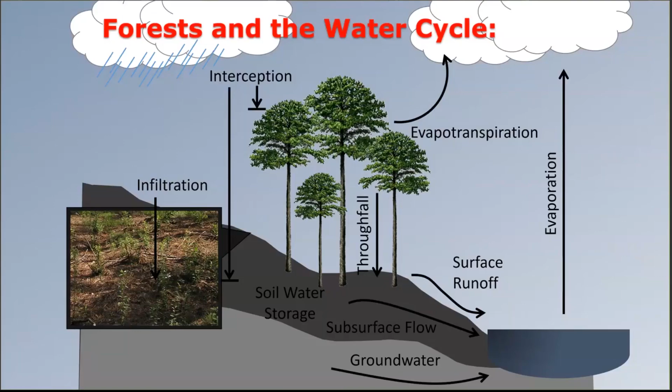Urban environments all have similar general characteristics. As urbanization increases, you see a decrease in tree canopy, vegetative ground cover—these are like your grass layers—and also your permeable topsoil. These are removed for impervious surfaces, things like roofs, asphalt, concrete, severely compacted soil, basically any surface water can't infiltrate into.

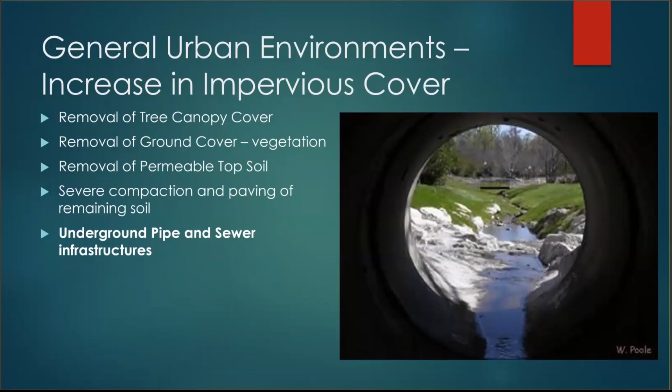As land loses its ability to absorb rainfall, we see a significant increase in surface runoff. It's also important to note that surface water quality will be much lower and flood risk will be much higher in these areas. This is due to the increased impervious surfaces, but also the storm drain infrastructure in residential and urban land uses. Storm drains are pipes that rapidly move stormwater off the streets and roads, unfiltered, into rivers and streams. Impervious surfaces provide runways to increase the speed of runoff, allowing more pollution to be picked up.

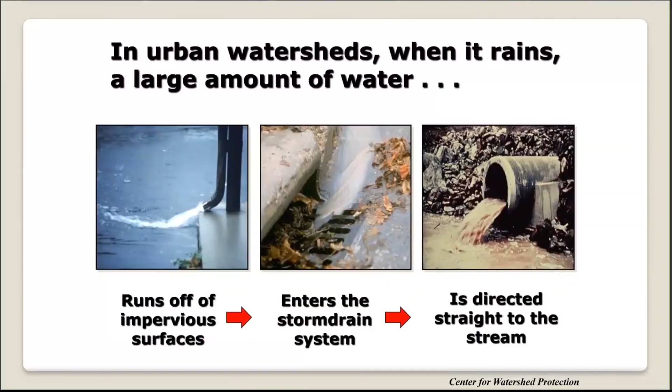So think of how in a large rain event, when water runs unimpeded off your roof, out your gutter, down your driveway, and joins a larger flow of runoff in the streets, it's picking up more and more speed all the while. That runoff is taken rapidly down a storm drain, carrying with it physical debris and other pollution as it enters into the water body much faster than the natural drainage process. These are all the negative impacts of increasing surface runoff.

The official term for the polluted surface runoff we've been talking about is called non-point source pollution. This is when the source of pollution in your water can't be identified because it's coming from runoff over an entire landscape area. The type of non-point source pollution depends on the type of land use. Excess fertilizers and herbicides are common in residential areas, while bacteria, nutrients from pet waste, and faulty septic systems are more common in urban areas.

For increased frequency and severity of flooding, the two key elements to flooding are rainfall intensity and duration. Intensity is the rate of rainfall, and duration is how long that rain lasts. All rivers and streams move water at their natural flow. So in a large rain event, when you get a lot of surface runoff, the speed of that runoff increases as your intensity and duration increase.

The more speed the runoff picks up, the more erosion it can cause and pollution it can carry into the water body. So when the runoff reaches its top speed, it's called a peak flow. Peak flows occur in all rain events, but in a major rain event, the velocity of the peak flow can surpass the natural flow of the stream. As that peak flow enters the stream faster than the natural flow, water levels rise and eventually flooding occurs.

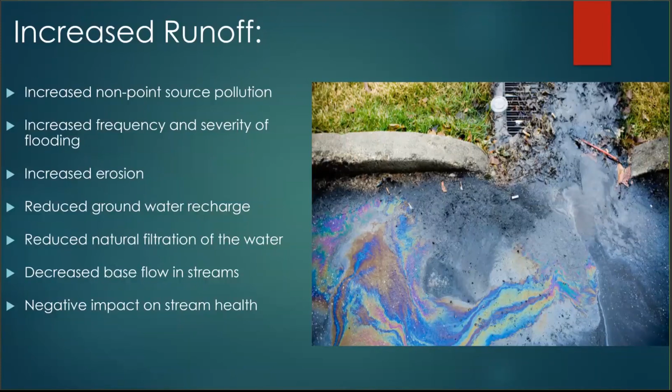Trees help slow down runoff and allow for more infiltration, decreasing frequency and severity of flooding, while also facilitating groundwater recharge, increasing base flow, which increases the natural filtration of the water. Trees also have a really cool phenomenon in rain events that help slow down stormwater. This is called dynamic storage capacity.

The interception we talked about earlier is the water storage after a rain event, also called static storage. This is the water that trees keep and never allow to become part of surface runoff, and it was quantified to about 0.2 millimeters of rain per meter square of a tree's leaf area. Leaf area is the projected area of leaves over a unit of land, but it might be easier to think of a tree's canopy as a container that will capture rainfall up to a depth of 0.2 millimeters.

However, studies have shown that during a rain event, trees actually intercept and store more water than they need. This is called dynamic storage capacity. A study done by Xiao and McPherson quantified the dynamic storage capacity of broadleaf trees to be 0.77 millimeters per meter square of leaf area, and coniferous trees to be 1.25 millimeters. Trees will hold on to this excess rainfall for anywhere up to 3 hours and slowly drip it out, slowing down the speed of your runoff and allowing more time for biological processes to take place.

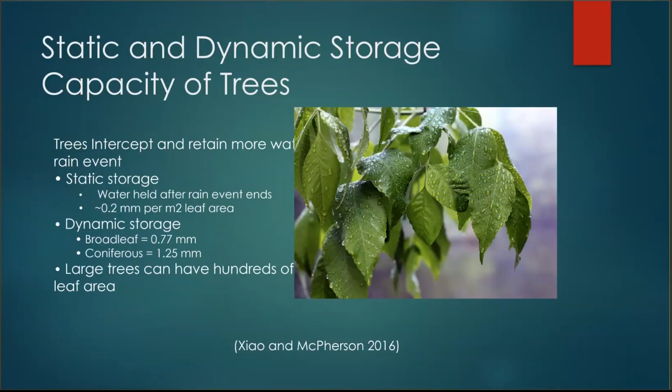So this would be an example of a common hackberry, which is a good riparian species tree. In this example, the tree is 50 feet tall with a 14-inch diameter trunk at breast height and has a 35-foot crown spread.

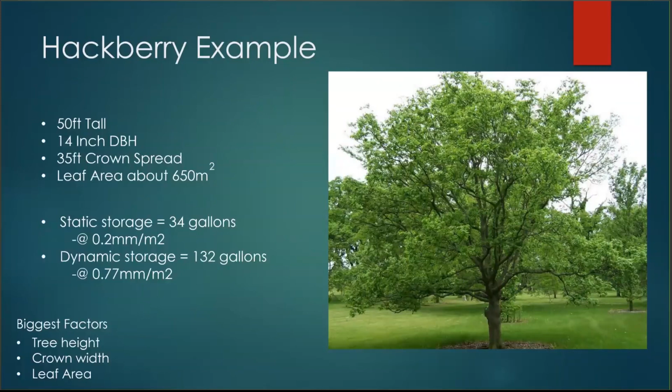Using an online tool called iTree Eco, I calculated the leaf area to be about 650 meters squared. Taking that number into the USGS rainfall calculator, we find the static storage to be 34 gallons and the dynamic storage to be 132 gallons of water. So in a rain event, this one hackberry tree delays almost 100 gallons of stormwater runoff for up to 3 hours and prevents 34 gallons of water from ever becoming runoff.

This is a side-by-side case study done in the North Carolina Piedmont. On the left is a 3 square kilometer forested and open space watershed, and on the right is a growing urban watershed less than 1 square kilometer in size. The forest is 1% impervious and the urban area is 44%. These areas are less than 30 miles apart, just north of Raleigh, North Carolina.

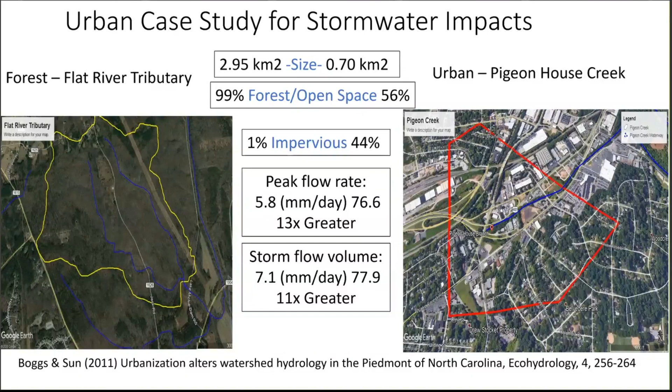In the urban watershed, the peak flow rate was 13 times higher and the storm flow volume was 11 times greater, meaning stormwater runoff for the same storm moved 11 times as much water by volume and 13 times faster than in a forested watershed. And this study was only at 44% impervious. Generally, urban landscapes in bigger metro areas have impervious surfaces much higher than that.

When we examine the Dallas-Fort Worth area specifically, it was the fastest growing metro area in the last decade, adding more than 1 million citizens in the last 8 years. It's expected to be one of the fastest growing in the next decade too, which is a good thing, right? Growing population implies opportunity, which implies fundamental desirability. People perceive the Dallas-Fort Worth, North Texas metro area as a great place to live and where they can succeed.

Adding people means an expanded workforce. New residents mean new customers for local businesses, which increases tax revenues that cities can put into roads, schools, and parks. We understand this, and one of the big points we're trying to impart is that we're not against population growth and urban expansion. But all this growth is possible while maintaining sustainable watershed health, and for that to be true, careful planning is critical.

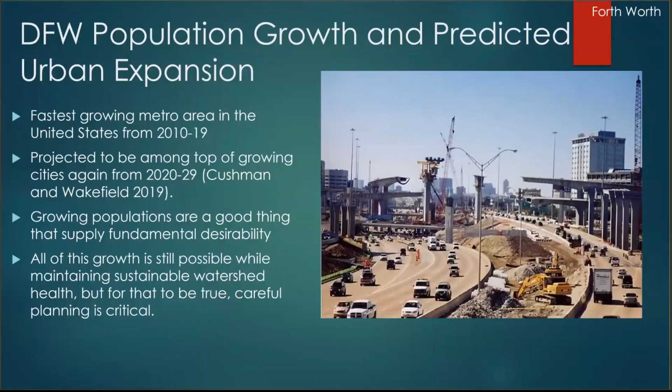Unplanned rapid urbanization is one of the biggest threats to watershed health. A study by the Committee on Environment and Public Works in the United States Senate found that an 8% increase in population could correlate to a 41% increase in impervious surfaces. We talked about how impervious surfaces increase flood impacts and non-point source pollution, but they also put serious strains on the streams themselves.

These are pictures of a stream in the W.G. Jones State Forest in Conroe, Texas. The area saw a lot of development in the last half century, particularly around the Jones State Forest, and in turn this stream has had to take on increased stormwater runoff and higher peak flows than it was naturally carved to handle over hundreds of years.

As you can see, the stream bank is eroding, bringing unwanted sediment into the stream, which over time will affect stream flow and degrade water quality for aquatic life. It can even get so bad that it negatively impacts human health. The EPA maintains a list of impaired water bodies in the United States called the 303(d) list. Several bayous in the Houston area are so impaired that they have non-contact restrictions, meaning if someone were to swim or eat fish from one of those bayous, they could get seriously ill.

Overloading our streams and increasing the severity of flooding has serious financial impacts, specifically in urban areas, because they have to rebuild cities, businesses, and infrastructure after a flood. I'm going to keep picking on Houston here because it's where I work, and it really is one of the best examples of the negative effects of rapid unplanned urbanization.

Houston has no zoning laws. People are able to build pretty much anywhere, including right on the creeks and bayous. Houston is an area that, due to its geographic location and soil hydrology, was seriously impacted by flooding even before paved roads and impervious surfaces became as fundamental as they are today. Of the 10 most costly hurricanes in U.S. history, Houston has 3 of them, and they all occurred in the last 15 years. Hurricanes Harvey, Ike, and Rita caused an estimated $174 billion in damages combined.

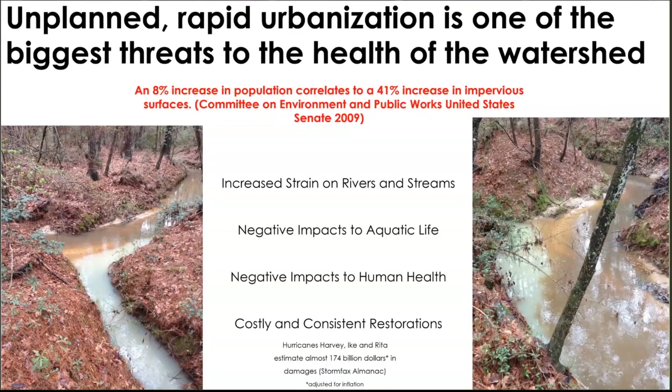So how do we avoid rapid unplanned urbanization? The simple answer is planning. When planning new development projects, it's important to understand how all phases of development will impact stormwater runoff. There are several things to consider to positively impact the watershed through the design, construction, and post-construction phases.

For the design phase, consider LID, or low impact development, which is the idea of designing properties to manage stormwater runoff as part of green infrastructure. LID emphasizes conservation and the use of on-site natural features to protect your water quality.

This permits water to be treated where it falls, allowing for the natural filtration of the water underground, and limits how much it will need to be treated later at a wastewater treatment plant.

An example of LID is green or vegetated rooftops. This is where you plant vegetation on the sloping roof to help slow down stormwater, and in some cases have irrigation systems that retain the stormwater in a rain barrel or capture system to be recycled for the building's use.

In the construction phase, consider implementing best management practices to protect vegetation and prevent erosion to protect your water quality. Consider minimizing paved surfaces and using alternative materials such as pervious pavement.

This type of pavement allows water to seep into the ground, helping infiltration and also limiting the compaction of soils. They also can save construction companies on installation costs because they don't require underground piping, storm drains, or any kind of sloping and grading, and will have a similar life cycle to that of normal pavement.

To manage for erosion, make a plan and be precise in where you're disturbing soil, and make sure you're mindful of preserving existing vegetation where possible. Think of it like shaving your sideburns - once you remove a tree or disrupt a vegetative root system, you can't just put it back.

And finally, understanding how the new structure and any subsequent parking lot or paved surfaces are affecting runoff. The water will be draining one way - is the speed increased, or does it have a new path? There are several best management practices that can help control stormwater, like retention wetlands, detention ponds, infiltration zones, and bioswales, that are all effective in managing stormwater before and after development.

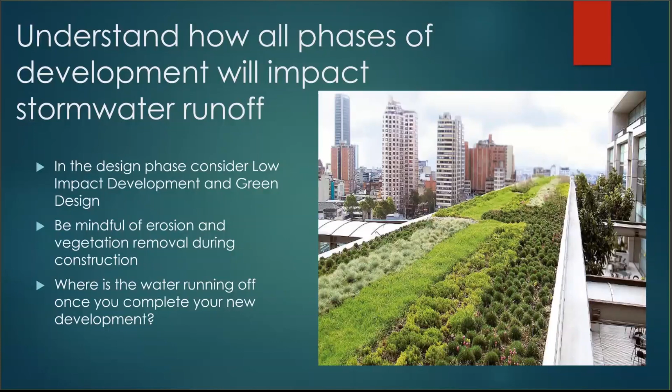So here are some of the current projects that are using trees to help protect our stormwater resources in developing areas. This is a quick overview, but we'll talk about each of these in a bit more detail.

One way is implementing the use of trees in watershed protection plans. Watershed protection plans integrate the viewpoints of all stakeholders in the watershed to help create solutions that benefit the community and the surrounding environment. Watershed stakeholders write a report on what pollutants are impairing the water body and the solutions to restore and protect the watershed in the future.

They then submit that report to the Texas State Soil and Water Conservation Board or the Texas Commission on Environmental Quality, which, if approved, help to fund the solutions for long-term watershed protection.

The Texas Forest and Drinking Water Partnership was established in 2015. This initiative works to increase understanding and communication between the forest and drinking water sectors, and is part of a larger regional collaborative called the Southeastern Partnership for Forest and Water.

The state of Texas is at the forefront of this partnership, working with municipalities, non-government organizations, and private forest landowners to identify and protect forest areas that are critical to surface drinking water resources. And lastly, we talked about implementing BMPs and LID, but just increasing your urban forest canopy as a whole has a myriad of benefits.

So this is the watershed protection plan I'm currently working on in the Cypress Creek watershed. Cypress Creek flows directly into Lake Houston, which is one of the largest sources of Houston's drinking water, so improving water quality is imperative here.

Throughout my job, I regularly use what's called the i-Tree suite of tools. These are tools created by the United States Forest Service, free for download, and they accurately simulate all the benefits of trees. They quantify data into residential energy savings, carbon capture, stormwater reduction, and even water quality.

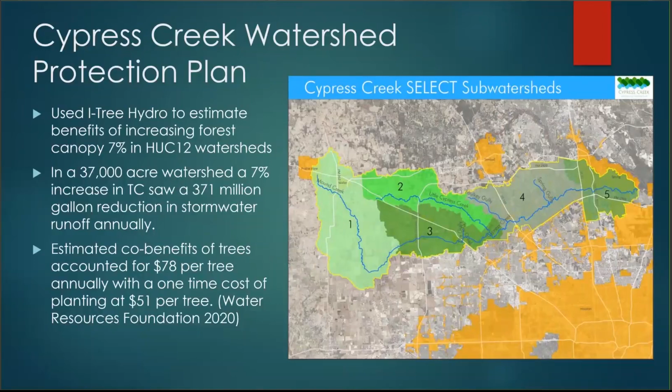The Texas Water Development Board has split Texas into 16 planning regions, generally based on shared watersheds.

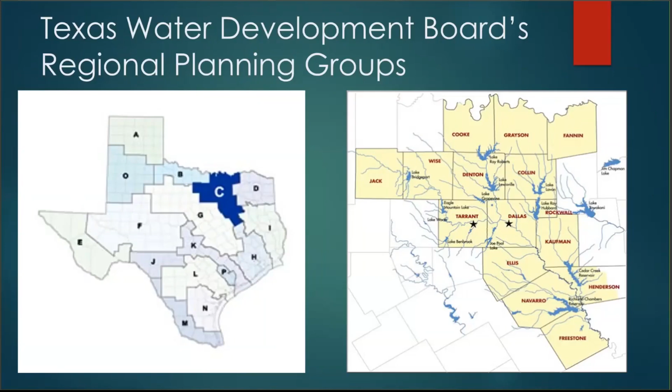The DFW falls into Region C, which includes 16 counties that overlap much of the upper portion of the Trinity River Basin. Region C also includes a smaller part of the Red, Brazos, Sulphur, and Sabine River Basins. Part of the reason these planning groups are split up is to quantify water needs based on land use and population sizes relevant to each area's watershed, measured in acre feet per year—the amount of water needed to fill 1 acre at a depth of 1 foot, equating to about 325,851 gallons. In a 2017 planning report, the Texas Water Development Board estimated Region C's water needs to be over 1.7 million acre feet per year starting in 2020, and 2.3 million acre feet by 2040.

That's where the Texas Forest and Drinking Water Partnership comes in. It follows the narrative that as populations increase, there's an increased need for clean drinking water, but we don't want to keep taking it out of the ground, so we have to limit subsidence. This means increased reliance on surface drinking water resources, and because forests provide the cleanest water of any land use, there's an increased need for forest stewardship.

Currently, all of the city of Dallas's drinking water is surface water, and by having water suppliers invest in forest stewardship to protect their source water, they can save money on treatment costs, energy bills, and filter media. One way municipal water suppliers can invest is by creating funds to acquire forested lands for conservation and protect them from future development. Another is providing incentives to private forest landowners to use best management practices to protect source water upstream.

These are some of the benefits of increasing your urban forest cover. We talked about the benefits trees provide for stormwater reduction and water quality, but they also save residents money on their energy bills. According to our most recent data, there are 33 million trees in the city of Houston, and those trees provided over $53 million in residential energy savings.

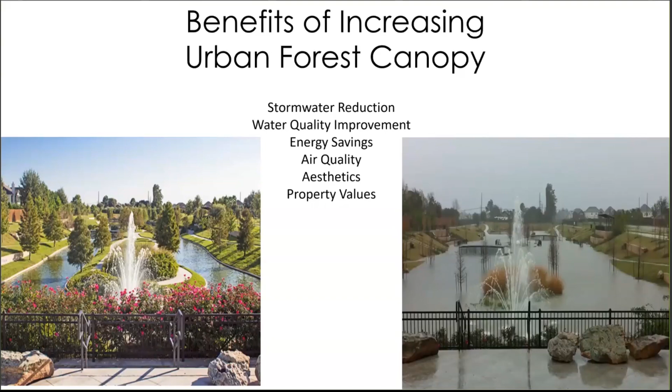The picture on the right is the same park after Hurricane Harvey, where they discovered that because of the added vegetation, the park was actually better suited for flooding protection.

Another interest of increasing your urban tree canopy is human health benefits. Studies have shown that trees provide positive impacts to your physical and mental health. They can help boost immune system defenses and pain tolerance thresholds, and can even save money on healthcare costs.

Texas A&M Forest Service's Urban and Community Forest Program is part of an initiative called Healthy Trees, Healthy Lives. This program aims to impact individual and community lives by ensuring access to community forests and green spaces. Our urban and community foresters foster relationships with local governments and healthcare providers to understand and apply the interrelationship between urban forests and public health.

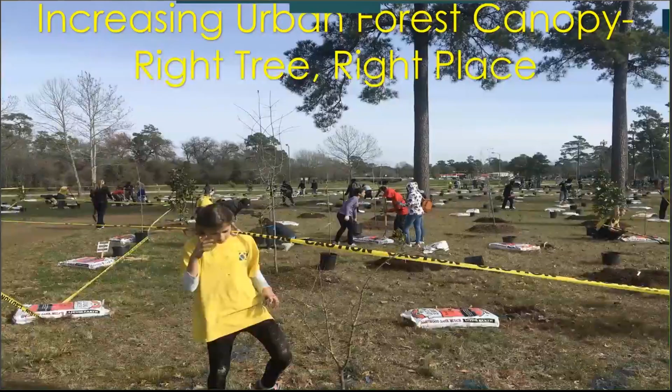So when increasing your urban forest canopy, you don't want to just plant trees for the sake of planting trees. It's about planting the right tree species in the right place with the right amount of growing space to maximize their ecosystem benefits.

So in conclusion, the takeaway should be that trees provide a number of benefits to urban watersheds, including positive impacts to water quality and flood mitigation. Abundant impervious surfaces and storm drain infrastructure increase peak flows of stormwater runoff and rapidly carry non-point source pollution unfiltered into our waterways. Understanding and planning for how stormwater runoff will be impacted by future development is critical to sustaining long-term watershed health while still fostering population growth.

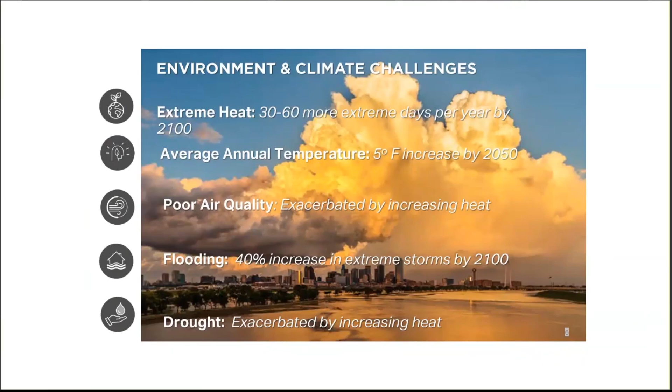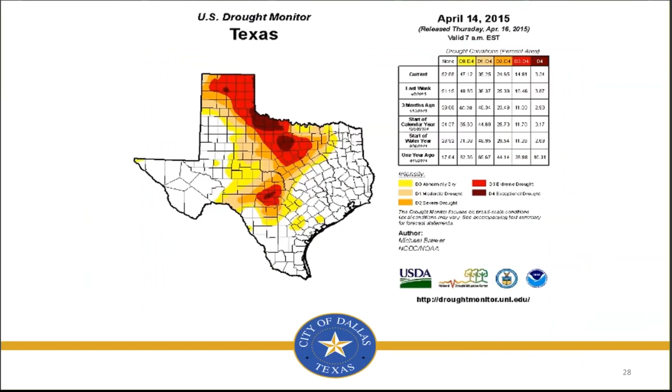This goes back to 2015 when we first started talking about this. This is a map of Texas. We were in level 3 drought, under significant water restrictions. A month later, we had our annual rainfall in about a month, and all 4 of the reservoirs upstream of Dallas were in uncontrolled overflow.

Those of you that know me know that I spent that month down in our emergency operations center. This was a heads up to all of the hydrologists, because this system had never been modeled with all 4 of those reservoirs in uncontrolled overflow. It was considered until that time to be statistically not probable. Statistics don't always tell the whole story, though.

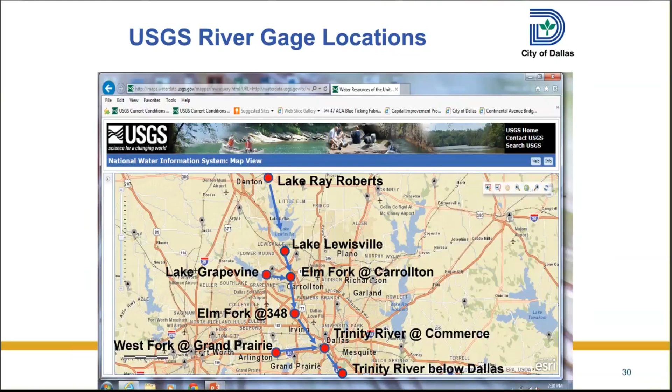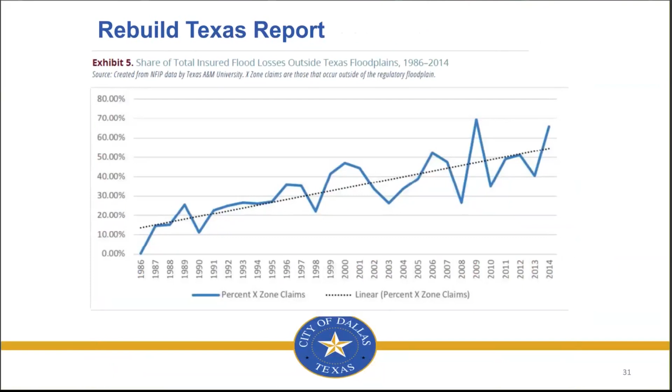So we started looking at that, and we're not the only ones. This is from the state report following Hurricane Harvey, showing the percent of flood losses located outside of the regulated Texas floodplain. You can see a nice increase in that. What is concerning is this is flooding in places that we didn't think it flooded.

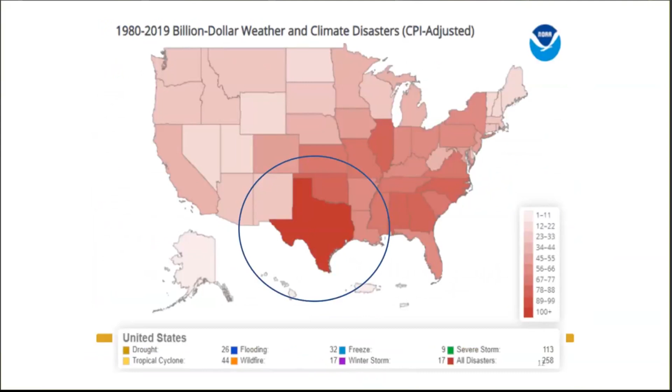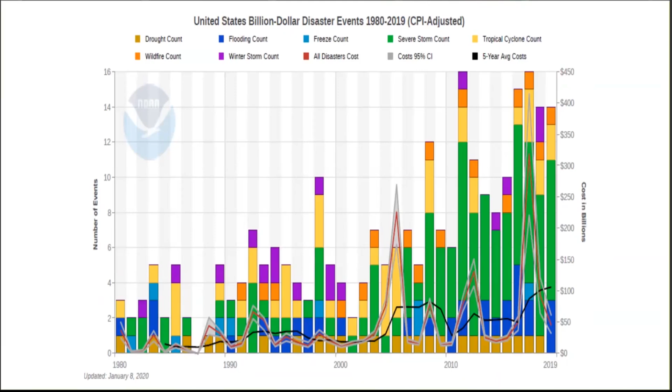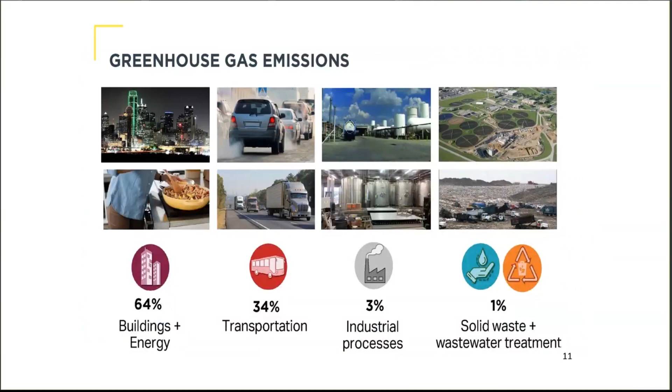So about a little over a year ago, we started working on a comprehensive environmental climate action plan. It was just passed unanimously a couple of weeks ago, May 27th. We looked at a bunch of things, starting, like most cities do, with our greenhouse gas emissions, the majority of which are in 3 different areas: buildings, energy, and transportation. When we started looking at how to fix that, we looked at 3 different primary areas.

We looked at mitigation, which is reducing those emissions. We looked at adaptation, which is how do we manage the risk of climate change, how do we protect our areas from flooding. And then, as we started looking at mitigation and adaptation, we kept coming up with elements that are in a 3rd realm, which is environmental quality.

And what we also found was that trees were involved with all 3 of those major categories of actions. So as we looked at environmental quality, mitigation, and adaptation, we kept coming back to trees.

Overall, our plan has 8 different areas. Don't worry, I'm not going to go through all of them today. I'll do a little bit in our water resources realm, and a lot in our ecosystems realm.

One of the other things we looked at were general primary benefits, but also co-benefits, which are things you get from doing something that you weren't necessarily doing it for. For instance, if we plant trees, we're trying to cool down the air, but we're also affecting the hydrology and the quality of life.

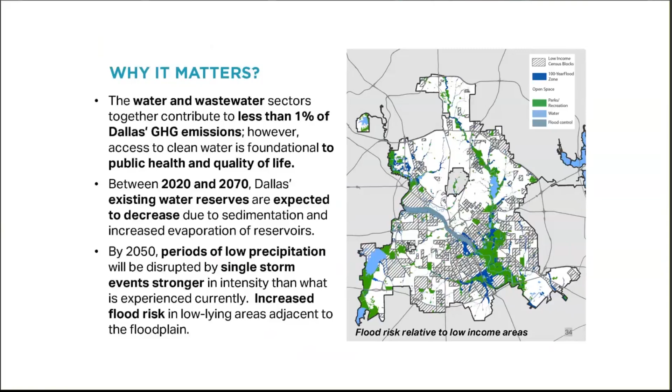One of the first things we did internally was update our trusty drainage manual. The city of Dallas has been one of the founding cities working with COG to develop the integrated stormwater management criteria, which is the local version of low impact design. We originally adopted ISWM on a voluntary basis back in 2009.

What we found, though, is that our engineers really loved this trusty guide from 1993. When we talked with some of our senior drainage engineers, they confessed it was actually 1978's criteria with a new cover. So we recently incorporated ISWM into the standard design process, for both paving and drainage, and updated that guidance.

It's available on our website. The one thing I'll tell you is that it still says low impact design is, I think the word is, encouraged. It was supposed to be required, consistent with CRS requirements, and we'll be working on that change shortly.

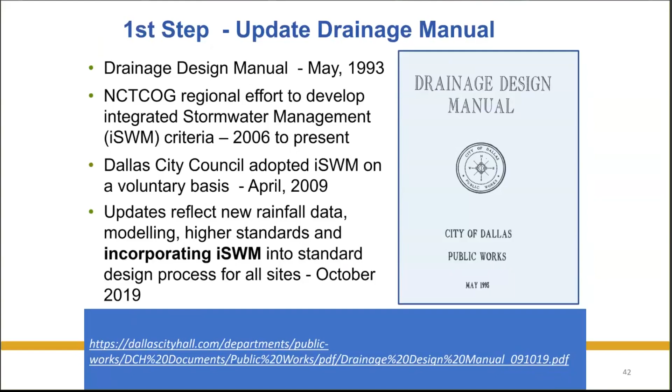One of the other things we've done is the city of Dallas has a higher standard policy where we require additional freeboard over the flood elevations, just to give us a little more room so that fewer of our properties are impacted by flooding. Unfortunately, we go to a maximum of 3 feet above the base flood elevation.

Some of the studies on this nationally show we should probably be looking at 4 or 5 feet. Not sure how we're going to look at that moving forward. However, we also understand that as we look at green infrastructure, that may give us a bit of a factor of safety on some of these other larger events.

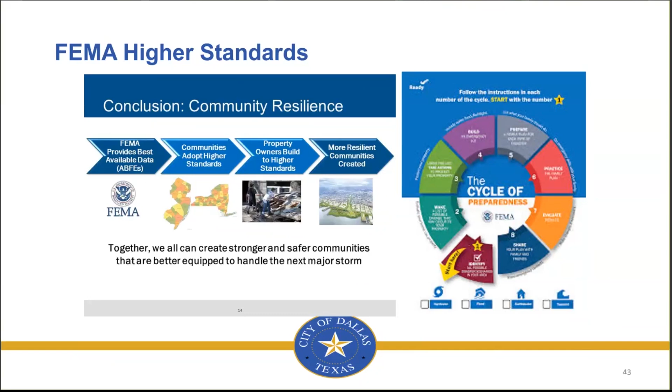This is likely Mac and Matt's most favorite section of our climate plan, and that is to really look at leveraging green space relative to climate adaptation benefits. We're looking to increase the amount of green area, and integrating nature-based solutions on a much greater basis as part of a global public health strategy in Dallas.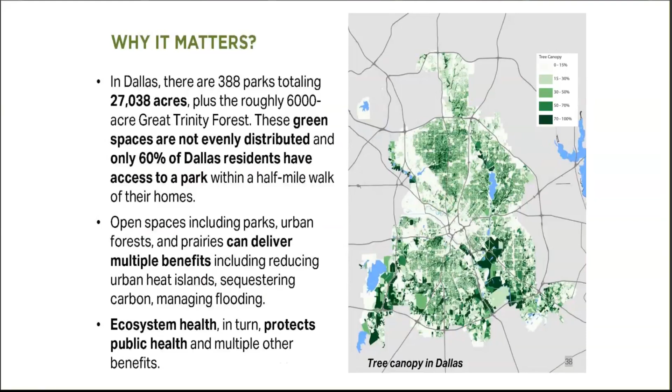It does help with our watershed management. It does help with our urban canopy. And it does help with both our air quality and our heat island impacts that drive some of the other climate-related issues that we anticipate.

I realize this has a lot of font that's really small, and I apologize for that. But the two places that we're already working: one is to increase our tree canopy, working with our friends and partners at the Texas Trees Foundation towards completing an urban forest master plan. We also work with Texas Trees and several other organizations to promote tree planting efforts across Dallas, both on public property and private property.

Each fall we do Branch Out Dallas, which is an effort by the city to give away saplings to property owners that would like to add trees to their property. These are, for the most part, Texas native trees that will do pretty well once they're established.

As I said earlier, all of our goals in our climate plan focus on helping improve our local air quality. Most of the different goals and actions have multiple co-benefits, and as you'll notice, we call them cross-cutting objectives.

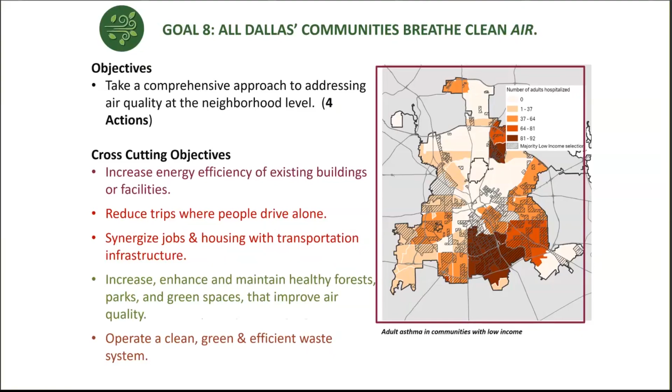So if you want a great summer read, the finished climate plan is at dallasclimateaction.com. We are in the process of developing a stakeholder committee to help advise our Environment and Sustainability Committee on implementation of the plan. I'd say stay posted on that because we don't have that completely figured out yet. It's something we're working on.

And with that, I'm open to questions.

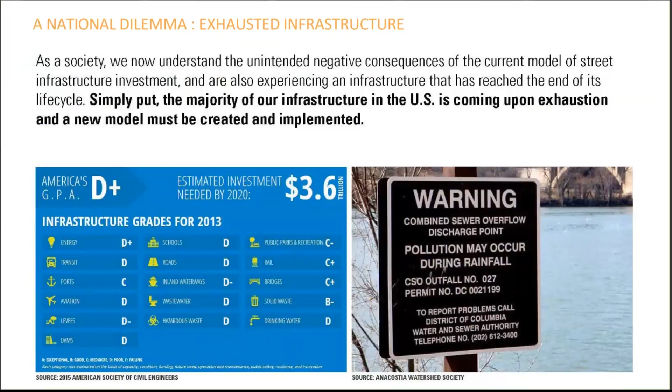It's easy to see that we have an aging infrastructure in this country. The American Society of Civil Engineers ranked infrastructure as a D+, with an investment of nearly $3.6 trillion needed to repair it.

We see infrastructure fail because of heat. We see infrastructure fail because of flooding. We can look at that infrastructure issue as a problem, which it is, but we can also look at it as a potential solution for the issues facing us.

It gives us a chance to redesign our cities. Cities take out billions of dollars in bond elections across the country, and most of it goes to street repair. In most communities, the largest amount of public space is within our public right-of-ways. In Dallas, 38% of all public space is within our right-of-ways.

But yet a lot of our right-of-ways lack sidewalks, they lack adequate areas for public use. They take water and drain it off into sewers and culverts, then move it faster and faster down the system.

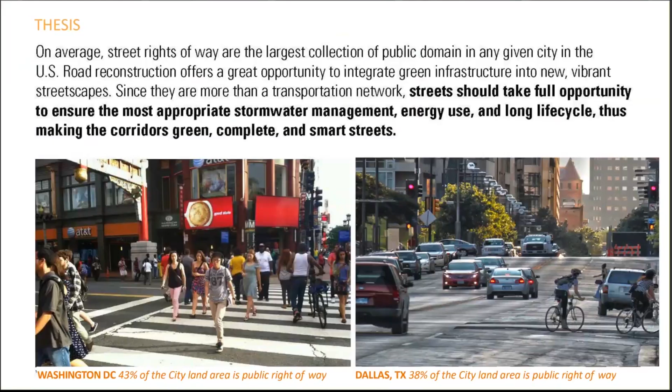So how do we start to rethink our streets, how do we rethink parking lots, how do we rethink how we design our cities as we rebuild them? Not only rebuild what we're doing, but as we continue to grow, design them differently. How do we think of our streets and public spaces as we become more urbanized in a more complete and smart way?

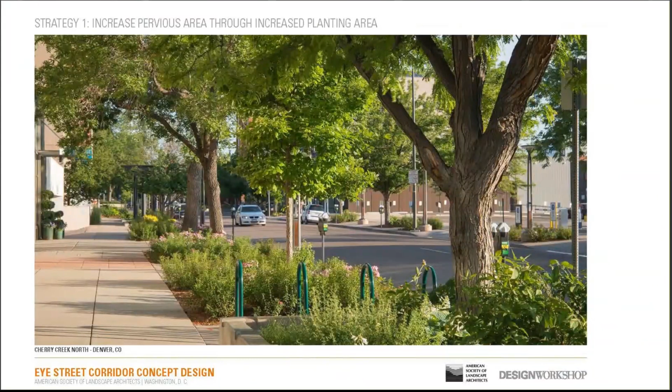We need to do that in a couple of different ways. One is increasing the amount of pervious area that you have. The more impervious surface area you have—and you heard Mac talk about this earlier—it leads to larger amounts of stormwater runoff and increases the urban heat island effect. So how do we increase pervious space to make more room for things like trees and other water mitigation strategies, besides just running it into the nearest storm drain?

But there's an issue—if we have engineers or architects, this is why everybody calls me and says we can't do this, because trees interfere with that. Trees do need certain things to grow. They're living, breathing organisms. They need proper soil volume, water, and nutrients.

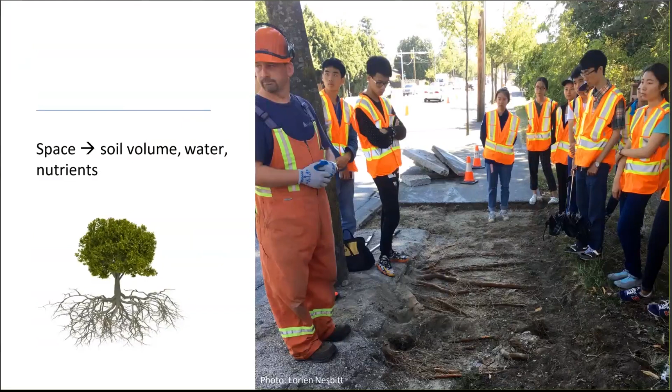Trees need on average about 20 cubic feet of soil volume for every 1 foot of crown diameter. So imagine a 40-foot canopy tree needs roughly 800 cubic feet of soil. That's a lot of room, that's a lot of space, and you have to compete with a lot of other things within that infrastructure.

So how do we start to think outside the box? How do we start to use other types of materials that are on the market now, like structural soils and things like Silva Cells and suspended pavement types of material, where it allows you to not have to compact the soil substrate underneath the sidewalk, street, or parking lot to such a degree that the tree roots won't physically grow, but still be able to get the support that you need for vehicle and traffic.

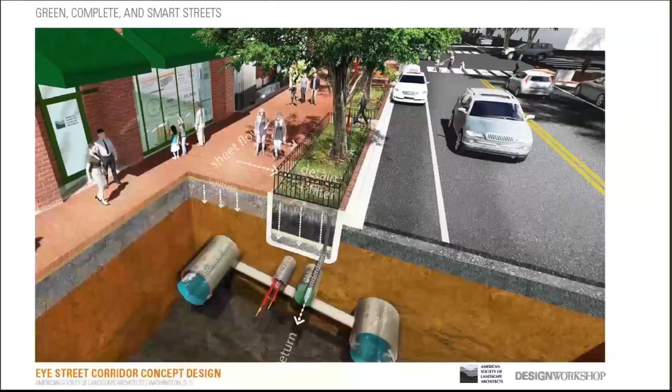And yeah, there's some extra cost here, but if we're not spending it upfront within this development and how we redesign our streets and parking lots, we're going to spend it on the back end as we start to have to clean up or retrofit these sites. I'm going to show you some examples as we move through.

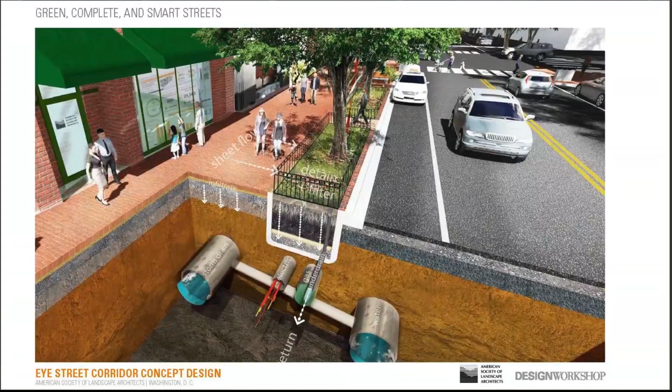So it's how do we start to redesign these right-of-way spaces to be able to handle all of the different types of infrastructure needs that are there, and make sure that we maintain and leave the type of room that is needed for trees and plants to be able to flourish and grow and maximize the benefits that they can provide. And this can be done.

And then the other way is, how do you increase the permeability of even the hardscape that you're going to have? So using things like porous concrete or permeable pavers, or designing the water flow around that site so it's flowing into areas where you can capture the stormwater.

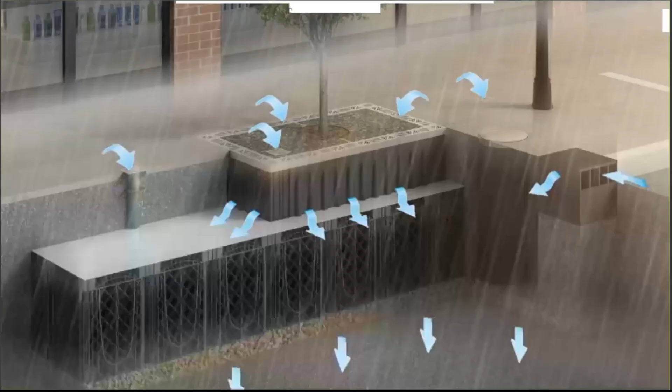And if you are creating that soil volume that is not compacted, now you can use that soil volume as a way to be able to capture and hold stormwater, and release it slowly back into the system.

So not only do you have the tree that's capturing and holding the water that Mac talked about earlier, but now, even in a heavily dense urbanized area, you have the entire soil volume that tree requires to grow capturing and holding that stormwater as well, and then releasing it slowly back into the system. And if you do this over a large enough size, you can dramatically decrease the issues you have with stormwater runoff, water quality when it comes off, and cutting down on things like flash flooding.

And why is this so important? Here's the first case study: the City of Philadelphia. Philadelphia was facing a really big problem because they're an older city in the Northeast, and their sewers and stormwater systems are combined—it's called a combined storm sewer system. Luckily in Texas we don't have that problem; we were smart by the time we got here and divided those systems. But in Philly, they didn't.

So every time it rained and they had flash flooding, as the city continued to grow, you can imagine the mess they had. This was a $9.6 billion fix if they were going to solve it with all traditional piping and gray infrastructure. They had a very astute mayor at the time who said, well, one, we don't have $9.6 billion to fix this problem—there's got to be a better way.

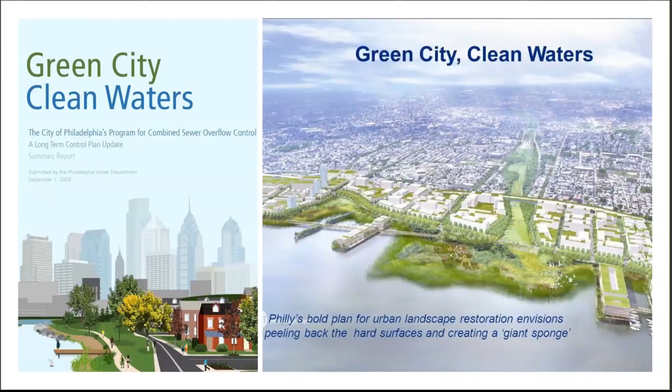So they embarked on a very ambitious 25-year program to invest in the neighborhood of $2.4 billion in green infrastructure. They do this through tax abatements, through incentive programs, through partnerships to convert traditional gray infrastructure into green infrastructure, and plant a whole bunch of trees. They're now roughly 9 years into this 25-year program.

And what they're starting to find as you go through this is, one, an economic impact of over $4 billion. They're seeing a creation of jobs. Not only are they meeting their stormwater needs, they're anticipating they'll be able to reduce the amount of stormwater runoff from their sites by as much as 84%.

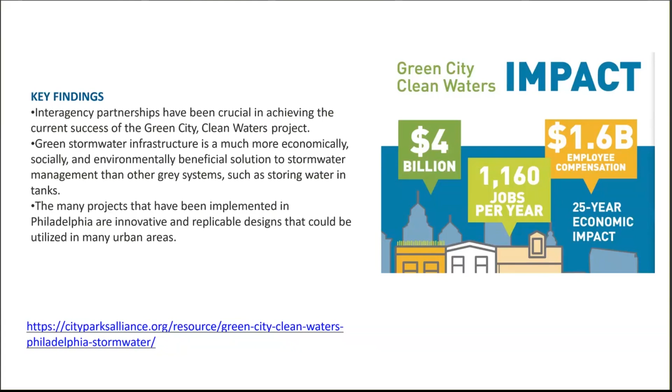So just by thinking again about how we incorporate green, how we incorporate trees, and getting away from the traditional way we manage stormwater within a city, even on a very, very large scale, you can have dramatic impacts—not only on stormwater management, but also on economic growth. And that's something we're using as a model on a project we're working on here in Dallas within the Southwestern Medical District.

We have been working very closely for the last 4 or 5 years with the 4 major hospitals on how we redesign the public spaces throughout the entire Southwestern Medical District, which is situated just north of downtown and just south of Love Field.

It's a very urban area, under 7% tree canopy cover, one of the highest urban heat islands in the Dallas area. There's over 80,000 visitors a day that either come to or travel through the Southwestern Medical District. So it's a very complex place, but it's a place where you can make a maximum amount of impact very quickly.

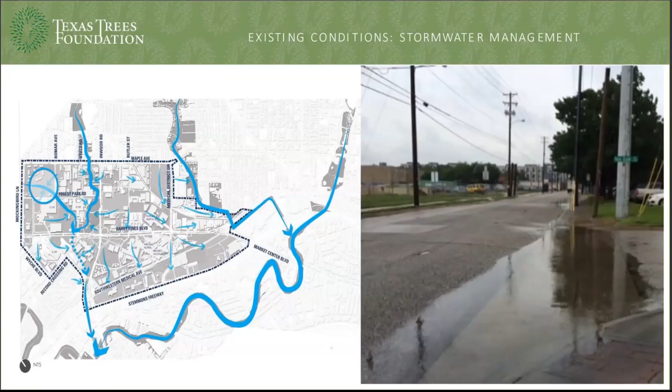We've done a lot of analysis and design over the years, and one of the things we looked at was stormwater management. There's miles and miles of missing sidewalk. There's areas where stormwater puddles, areas where it pools. There's not good drainage.

So right now we're in the design phase to completely redesign the public space along Harry Hines. That project is just starting design right now. We're going to design it to help manage stormwater, manage vehicle traffic, manage pedestrian traffic, and make Harry Hines in that area a place that connects the medical district together, not a space that divides it, as it kind of does now.

As this builds out and we create the best management practices and street designs, as the district continues to grow and redevelop, they'll be able to use the model we're producing here on all of the secondary and ancillary streets, so that this becomes an area that can be a model across the country for how to successfully incorporate green infrastructure, lots of people, and stormwater management in an effective way.

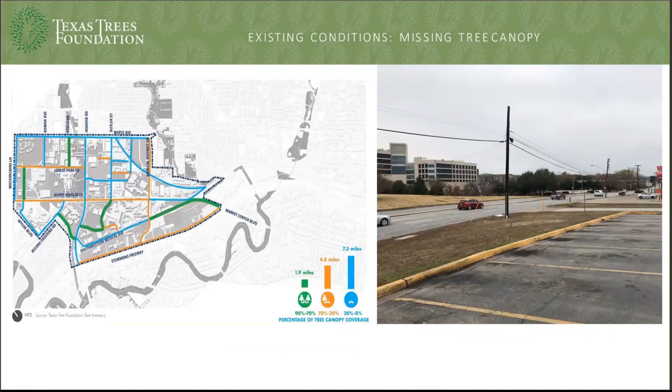So how do you reimagine it where it's more pedestrian friendly, bike friendly, has various types of mobile transportation, and is easy to get from one area to another, with an increased number of pervious surfaces and tree canopy cover to manage the stormwater and the urban heat island that exacerbates that area currently.

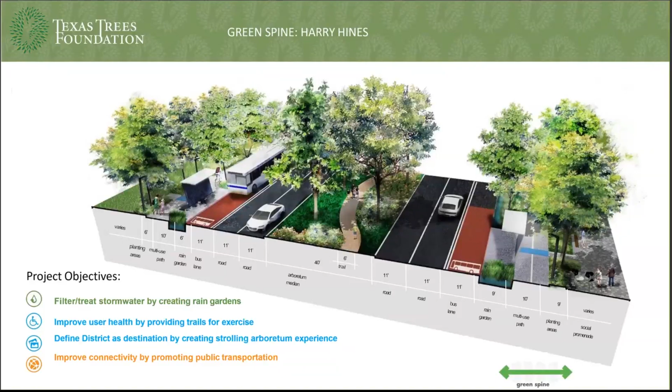That's a project that's in the works. I also want to talk about a project I'm sure Mac knows well. This is a completed project in Houston on a street called Bagby Street, in the Midtown area, located south of downtown. This was an emerging mixed-use district, cultural arts and entertainment area, that received some funding through a TIRZ, a tax increment reinvestment zone.

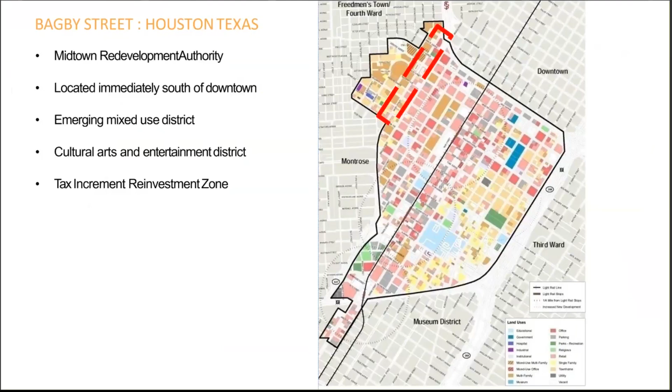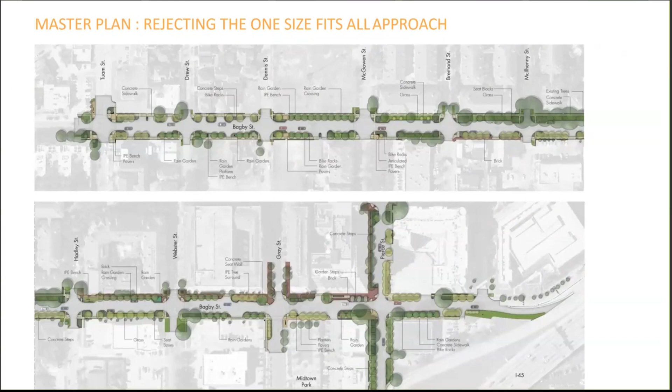It was also an area that flooded a lot every time it rained. So they worked really hard and had to push hard. When they decided to redo Bagby Street, they did it in a different way, threw the old way out, and rejected how they'd been doing streets in the past, reimagining the site so it was more pedestrian friendly, helped meet stormwater management needs, and was built to bring people to the area.

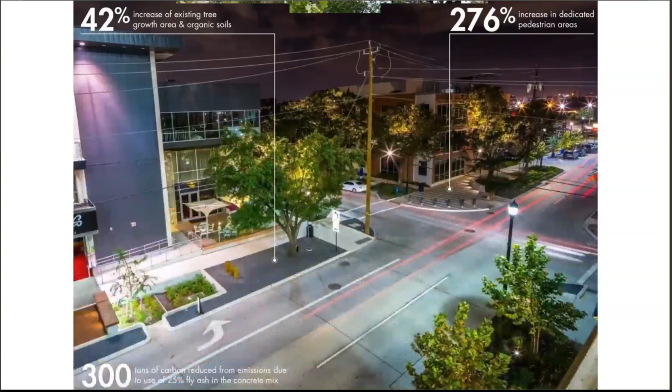They reduced the size of the traffic lanes and increased the area for pedestrian use by 276%. They decreased the hardscape by 14% and increased the number of trees and live plants. Once those trees are fully grown, they'll have almost 42% canopy cover in the area, which is unheard of in a large urban area like that.

So again, it's just reimagining how we design our streets — you don't need these wide lanes, and you can use more of that right of way for things like trees and space, and still not create traffic flow issues. And what they saw was amazing.

They included more space for people to sit and linger, which attracts more businesses. They used native plants, and they even put in lots of educational opportunities to teach people about what this site does.

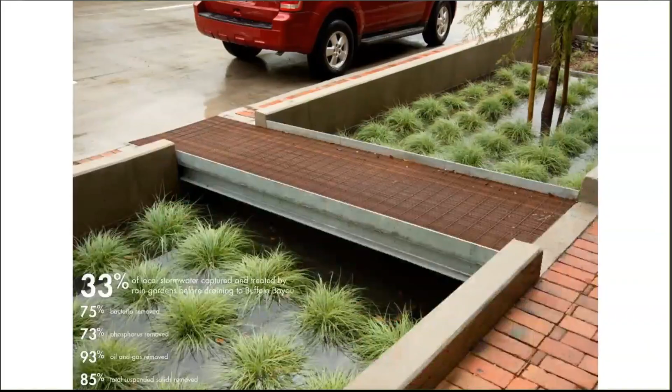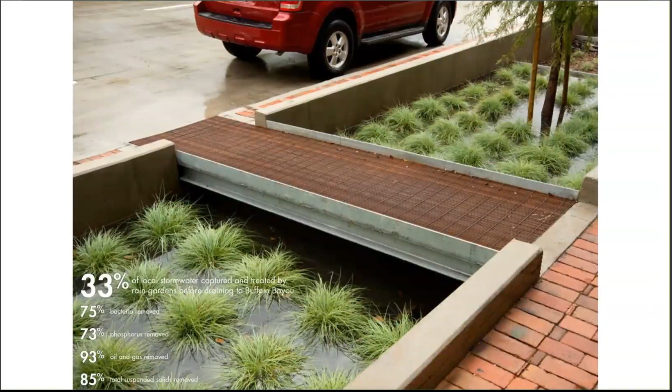I've even heard from people in Houston that during Hurricane Harvey, the whole area around here flooded, but Bagby Street did not flood because of the water retention area measures put onto this street. Similar to this, 33% of capturing local stormwater reduces bacteria, phosphorus, and other suspended solids that run off our streets and roads during flash flooding events.

As we move into a more and more virtual world, people want to go where they're going to have experiences, where they want to be. When you can invite an area that is more of an almost park-like setting where they're going to go and visit to either go out to dinner or shop, that's what's going to draw people. And the numbers show that if you invest in that, not only are you going to get the economic impact, but you're also going to get the stormwater value impact, which has to be paid for eventually, whether you're capturing it on the upfront or having to build the retention and larger infrastructure to handle that stormwater as it continues to grow.